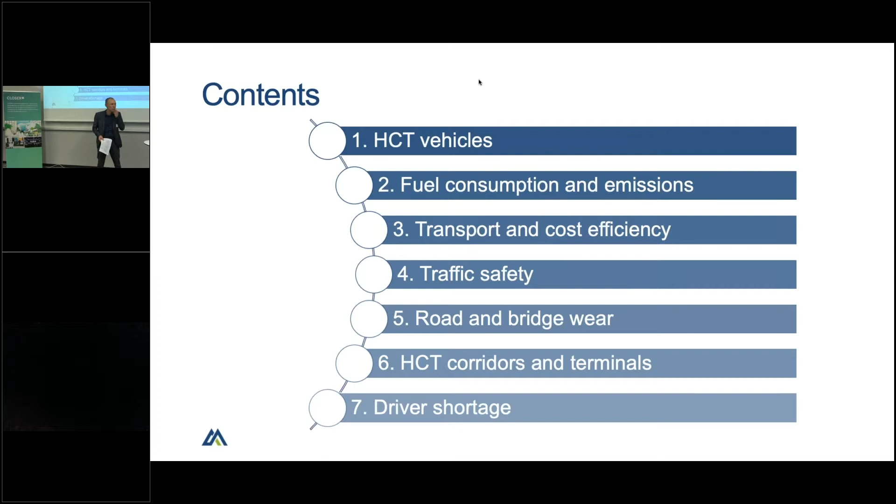Okay, thank you. Can you see my video? No, you need to try again, Pirjo. Okay, let's see. Oh yeah, I have to open this. Yeah, now it's coming, perfect. I think this hopefully works as well. Okay, so good afternoon, everyone.

Metsäteho is a research and development company owned by the Finnish forest companies, and we coordinate companies' HCT research here in Finland as it regards to timber and chip transportation.

Here are the topics that we have found the most relevant when we want to understand the pros and cons of heavier trucks. We do some research ourselves, but we also follow all available research carried out by universities, consultants, and authorities. My presentation provides an overview of the research going on in Finland and what has already been finalized, and I only focus on trucks heavier than 76 tons.

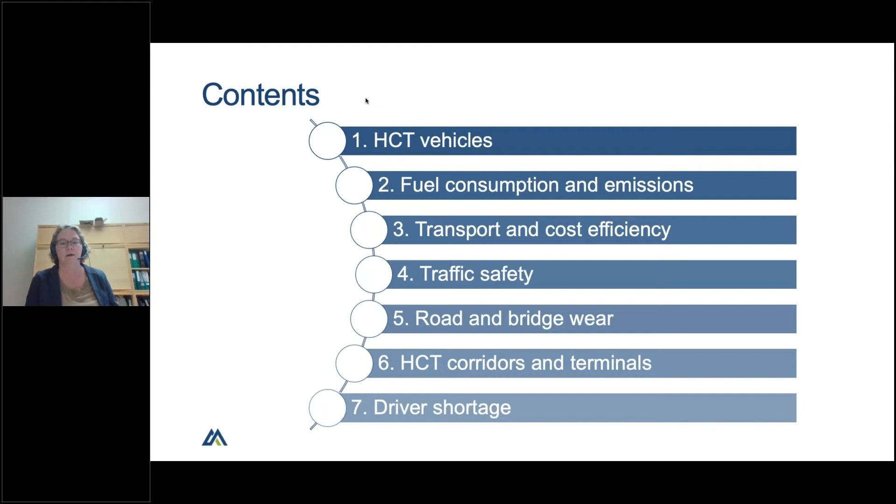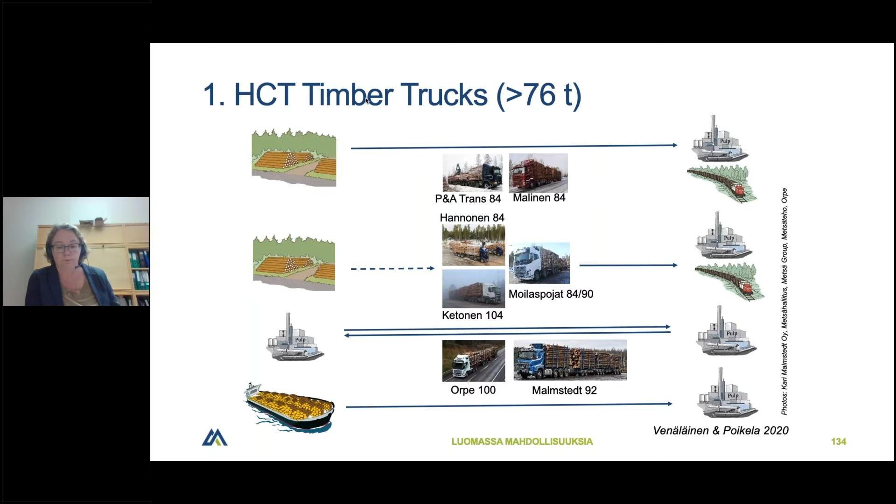In Finnish HCT trials, there have been timber trucks with a total weight from 84 tons to 104 tons. Some trucks drive directly from forest to mills, the 84 tonners, and the bigger trucks are so-called terminal trucks that only drive from terminals to mills. These forest trucks also use gravel roads and even private road networks, but the biggest ones only use paved roads.

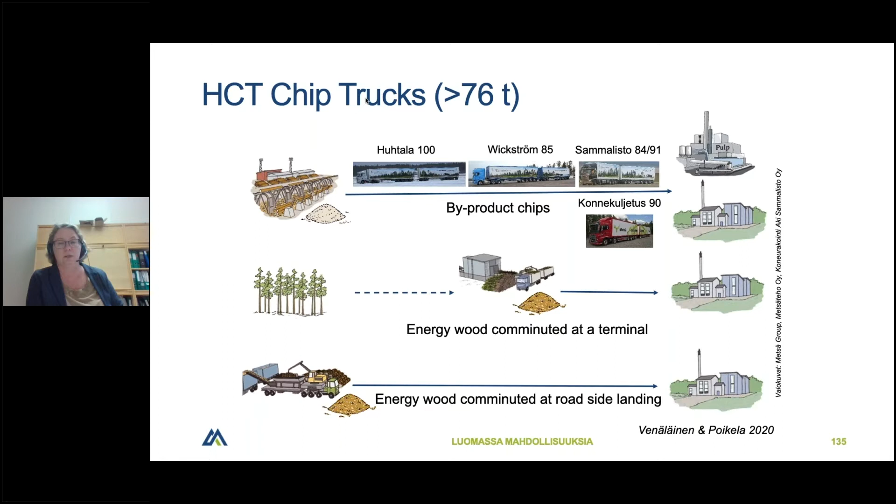For chip transportation, the big trucks in trials have a total weight varying from 84 tons to 100 tons. At least so far, these heavy trucks in trials have only been used for transport of byproduct chips, meaning they have regular routes from sawmills to paper or pulp mills. But there could also be potential for using large trucks for transport of energy wood chips if they are comminuted at terminals, and this comminution at terminals is getting more and more common, at least in Finland.

So what is going on right now? Since the companies have now gained a few years of experience with trucks of more than 76 tons in Finland, what we are planning to do this winter is interview transport and forest companies, and also manufacturers of trucks, trailers, and coupling devices.

We try to find the so-called perfect HCT truck - what would be the best measures, weights, number of axles, and other properties that would make that big truck suitable for different types of timber and chips. And of course, that truck should be not only efficient for transportation, but also good for the environment and for safety, and shouldn't cause too many problems on various types of roads.

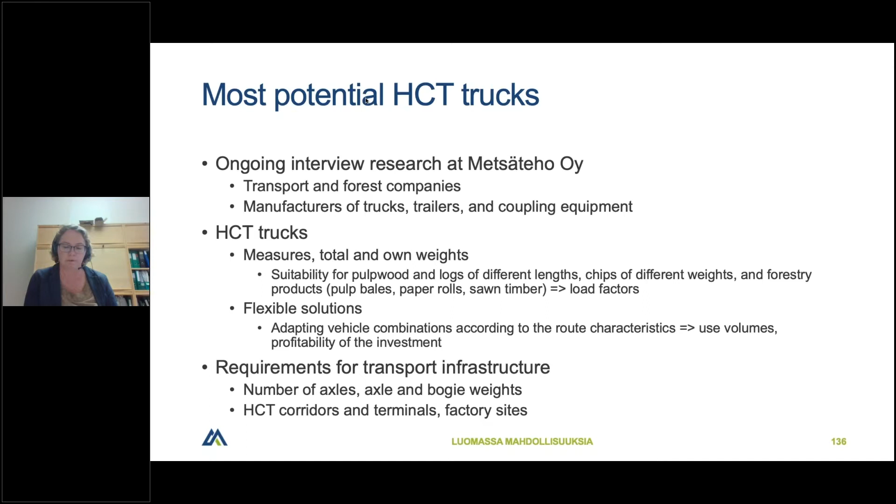Now I present some calculations from trucks involved in these trials. Here one must remember that all these trial trucks are individuals, and they use specific routes, so it's a bit difficult to generalize the results to a national level. But anyway, here are the results from the actual trial trucks.

In Finland, when it comes to fuel consumption, the average distance for timber transportation is about 100 kilometers. Here you can see that the heavier trucks are more fuel efficient than the current trucks if you count that per transported green ton.

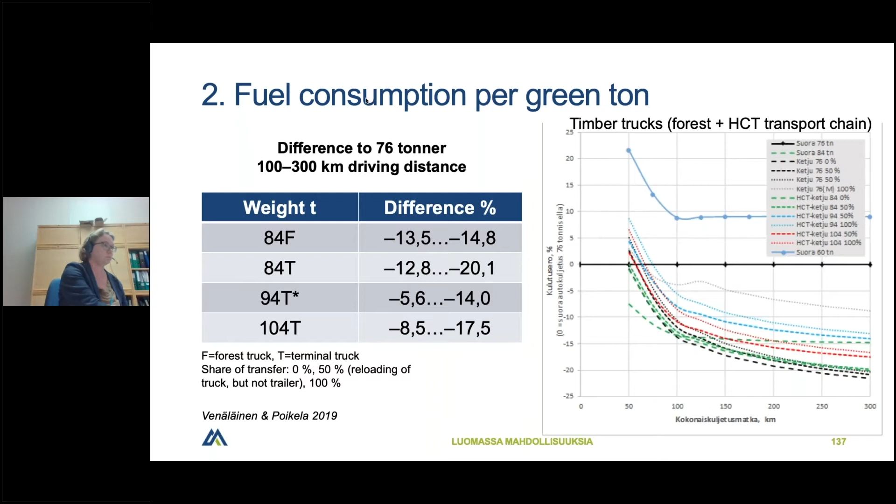In this slide, you can see our calculation of how much these heavier trucks would help us achieve the emission reduction targets of Finland. These heavy trucks are compared to a 60-ton truck, which was the truck size used in 2005, the reference year for this emission reduction target. If you take into account only the truck size, you could face emission reduction of even 25 to 35%. But of course this is partly theoretical. Anyway, it provides some idea of how much this size change would impact emissions.

About transport efficiency, we have calculated that if all Finnish timber or chips were transported with these heavier trucks, how many fewer loads would be needed every year. This is in theory, so there could be even 250,000 fewer loads for timber and chips every year. But of course, in practice, it's not possible nor efficient to use at least the biggest trucks in all transport. So this is one of our targets for the winter to come, to find more realistic potential for these different sizes of trucks.

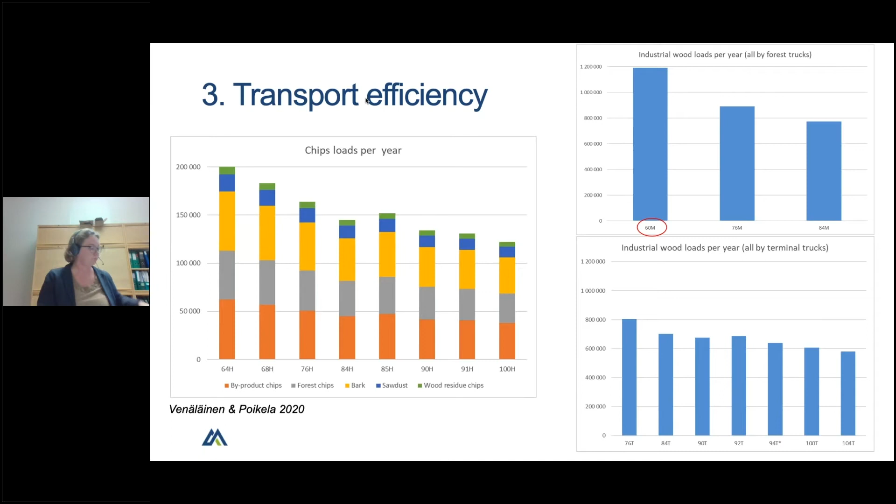Whether the biggest trucks bring transport cost savings depends on transport distance. One big challenge with timber is the terminal stage, when timber needs to be transported from a forest truck with a smaller total weight to a bigger terminal truck. This transfer from a forest truck to a terminal truck causes some extra costs.

But there are also benefits with using terminals. For example, it's quite natural to use terminals in a spring thaw period, but some transport companies use terminals all year round in timber transportation because they think it brings flexibility in the use of vehicles and drivers. This is one of the topics we will need to continue working with.

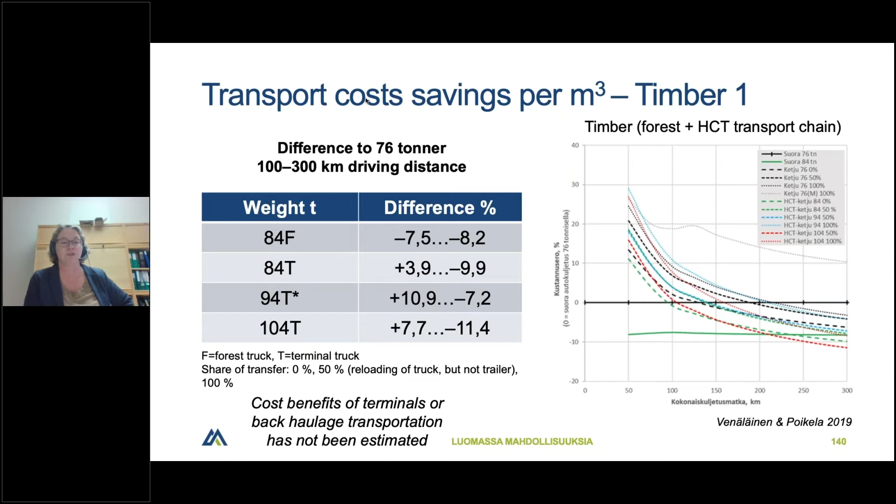Some transport companies are using swap bodies to transfer timber from a forest truck to a bigger terminal truck. This is one of the solutions you can use to make this terminal stage faster, more cost efficient, and also flexible in terms of transport planning of several trucks.

In some cases, forest companies have to transport timber from one mill to another, since not all mills use the same type of timber, or not at least the same amount. In this type of transportation, heavier trucks are very efficient, so we have cost savings of 10 to 20% per cubic meter.

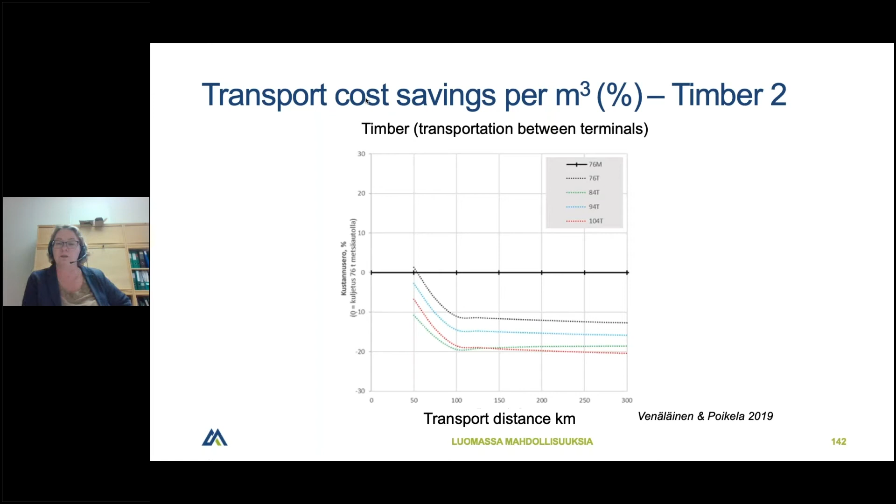It's the same for byproduct chips. When transporting chips from a sawmill to a pulp or paper mill, heavier trucks can easily bring cost savings. We have calculated these savings to be from 5 to 15% per cubic meter, depending on the size of the heavy truck.

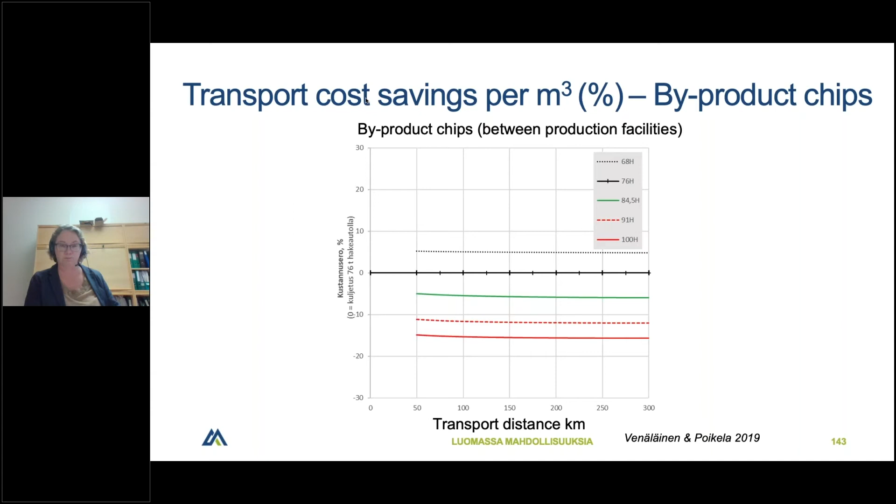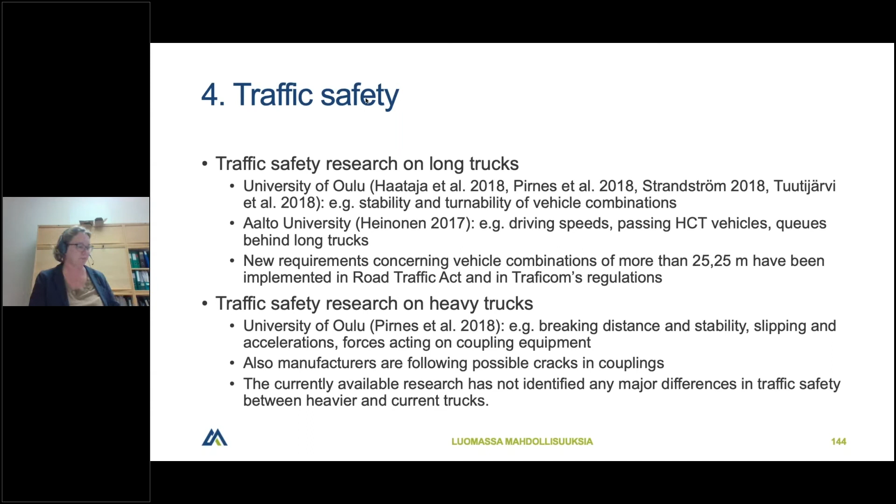Since the forest sector uses most of the Finnish road network, including private roads and gravel roads and so on, this road wear and bridge wear question is a big and very complicated one: how much of that network could we use for even heavier than 76 ton vehicles.

We actually hope that there will be more research next year, both on roads and bridge wear, so that we would know more about the impacts in different areas in Finland.

As Vesa already mentioned about this winter premium project, this is a project by the University of Oulu and the Finnish Meteorological Institute, just started this year, so it's quite in the beginning. They are studying the concept that there would be higher weights allowed when the road structure is frozen, looking at both gravel roads and paved roads.

At Metsäteho, we are trying to find new tools, new kinds of technologies to reduce road wear, also when it comes to current so-called normal trucks at 76 tons. We are hoping that with these new tools we might find more potential routes for these HCT trucks as well.

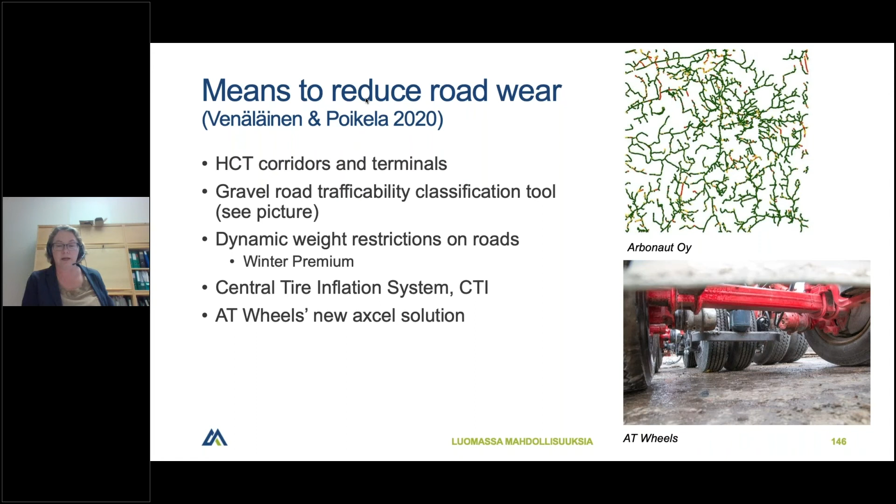Another major topic that needs further research is finding potential corridors for trucks more than 76 tons. As mentioned, it's not sure if these kinds of corridors will be presented or not, but we want to research this and try to find possible solutions.

We have identified various types of corridors that would be needed, both in timber and chip transportation. Some corridors are more direct from a forest, some are between mills, and some are from terminals to mills.

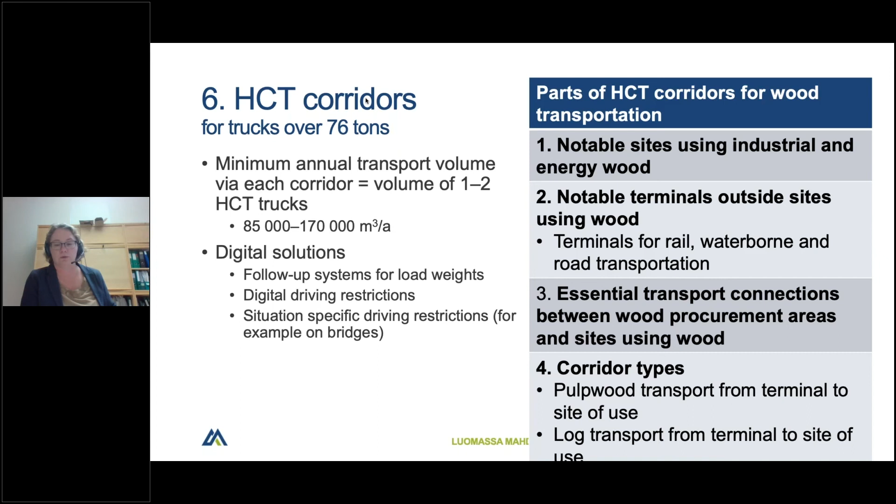As I mentioned, this corridor topic is one of the major themes we need to focus more on in the future, and we simply need to know more about the current transport flows, because there are some problems with the regional transport flow statistics. We also need to know more about the current state of road infrastructure in different areas of Finland.

When we know more about the flows and the status of infrastructure, that would help define the kind of HCT corridors that would provide the most savings, both in terms of costs and fuel consumption, but also corridors that would require only reasonable investments in infrastructure.

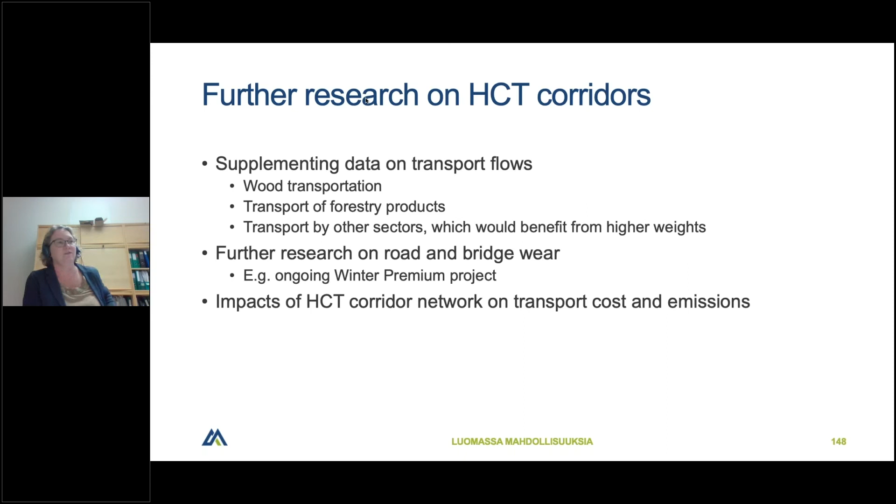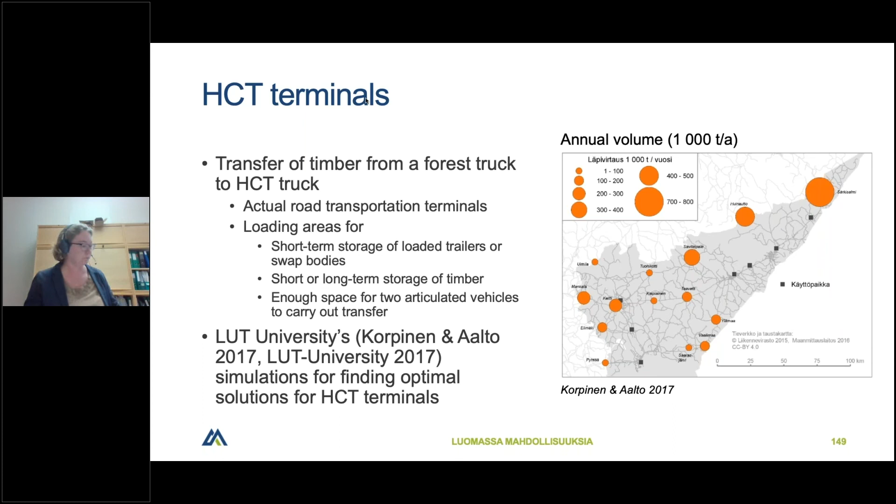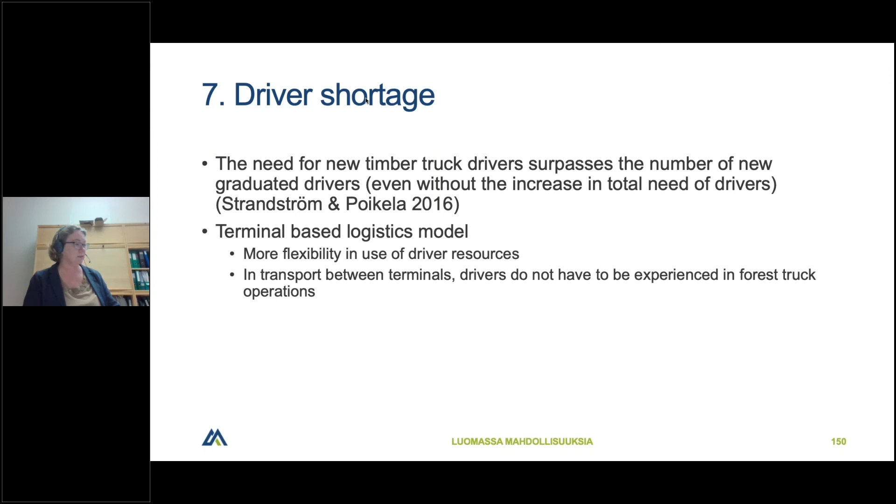Unfortunately, most of this material is in Finnish only, but there are a lot of graphs that you can probably understand even if the text is in Finnish. There's also going to be a summary available in English in a few weeks.

So thank you, this was all from me.

Pirjo, we still have 5 minutes before the next speaker. I have one question here, and one of my own. It would be interesting to compare these figures with the EU's 40 tons, then it would be even more of a difference. I guess that's extra work for you, but have you done that? I think it might not be so interesting for you, but it could be interesting for other countries. Have you done such a comparison?